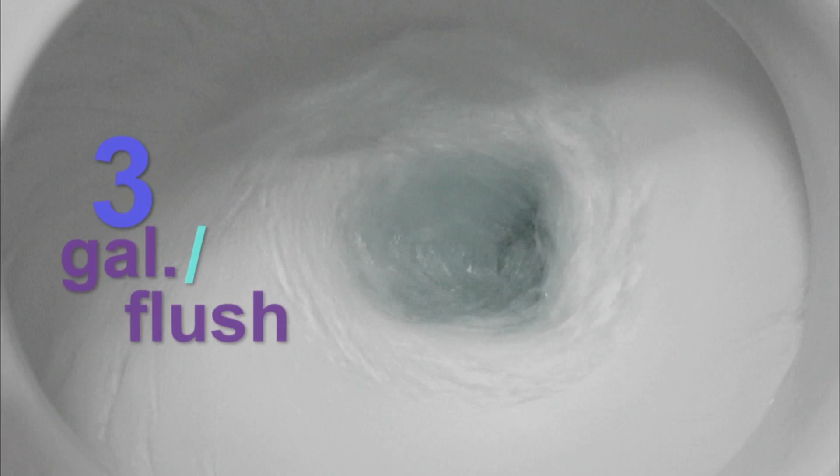Think about how much water we use every day. Our household chores, our daily hygiene, our lawns and gardens. The fact is, we each use more than 100 gallons of water a day, not to mention the huge amounts of water used by farms and businesses.

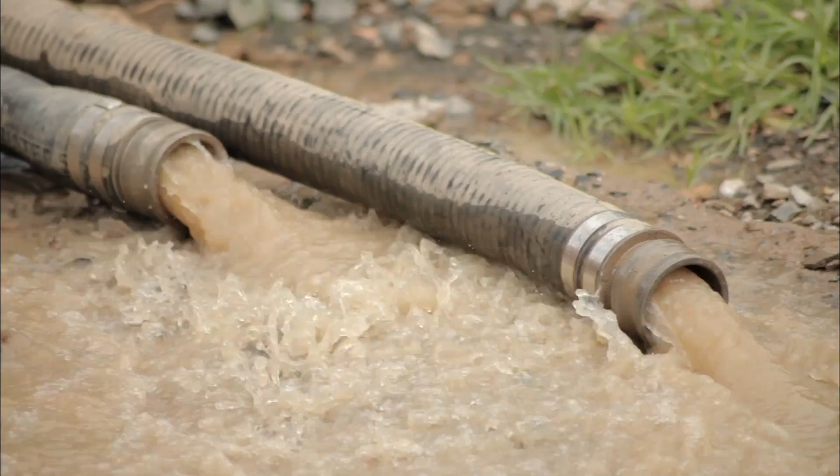Once we're done with it, the water seemingly just disappears. But here's the thing, it doesn't disappear. It becomes waste, and it needs to be treated. But our system for treating it in Connecticut isn't working. One region is even under state and federal mandates to correct the problem.

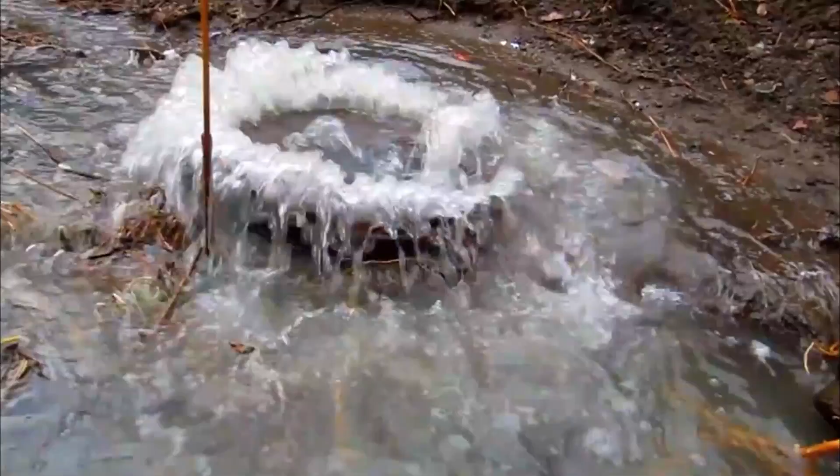Untreated human waste, untreated industrial chemicals and wastewater entering the water. Overflows of potentially raw sewage or partially treated sewage. Sanitary sewers can back up into the basements of people's houses. You have waterborne diseases that are created, and not a very happy population or a healthy population.

There's a problem and it needs to be fixed. But a solution is in the works, a massive initiative that will cost more than $2 billion called the Clean Water Project.

It's all being done by Hartford's MDC, the Metropolitan District. The MDC's Clean Water Project is really a dramatic and massive undertaking to really address a legacy that we have of older storm sewers and sewage sewers that are built in our older cities.

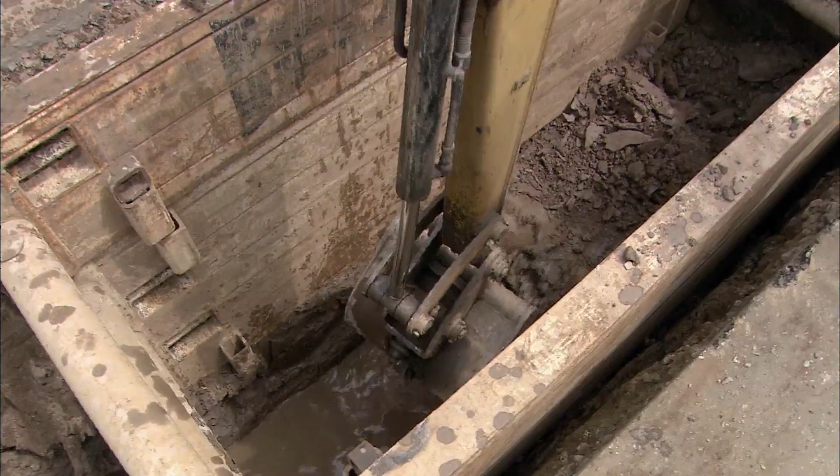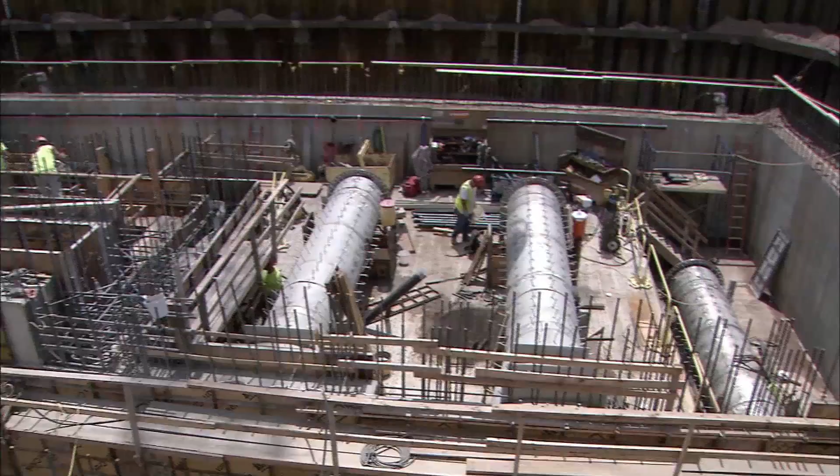We're doing the largest public works project any municipality's ever done in the state of Connecticut. It will take a lot of time, a lot of digging and building, negotiating and educating. Its efforts will have far-reaching effects for both our health and our environment.

Imagine life without sewers. Dumping dirty water outdoors in streets, dangerously close to drinking water supplies. That's how it was in the 1800s. Sewage and other raw contaminants were just literally running down the sides of the streets, causing public health implications.

Like many other cities, Hartford officials saw fit to build a system to carry that waste away. The city's first public sewer was begun in 1843 at a cost of $840. That's about $30,000 today.

The system grew in the 1850s, shortly before the Civil War, to serve about 30,000 people. It was considered state of the art. This was a massive step forward. Controlling sewage drastically reduced the incidence of waterborne diseases such as typhoid and cholera.

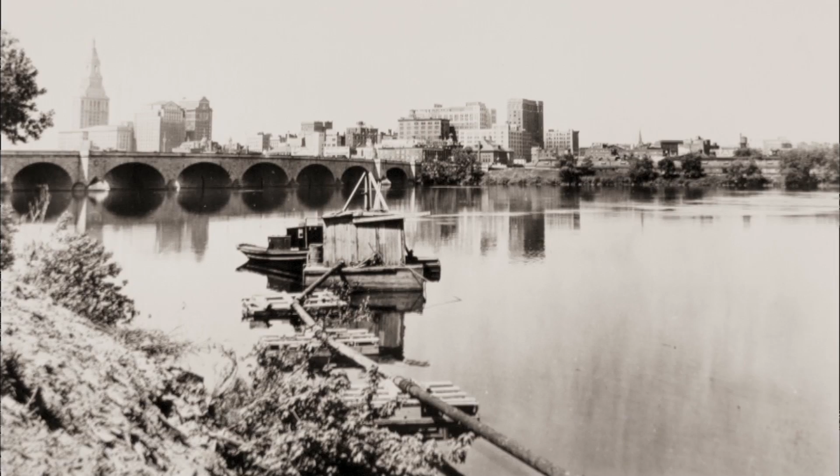But Hartford's, like most early sewage systems, discharged directly into area waterways without any treatment. Imagine yourself as an engineer at the time. What you're going to want to do is put all that water into a pipe and get rid of it. So the first poor solution, in hindsight, was just to have that pipe go into a river and a water body. Just send it downstream.

For almost a century, towns, cities, and factories in 4 states dumped their sewage into the Connecticut River, sending it downstream to become someone else's problem. The history of the Connecticut is a lot like the major rivers throughout the country.

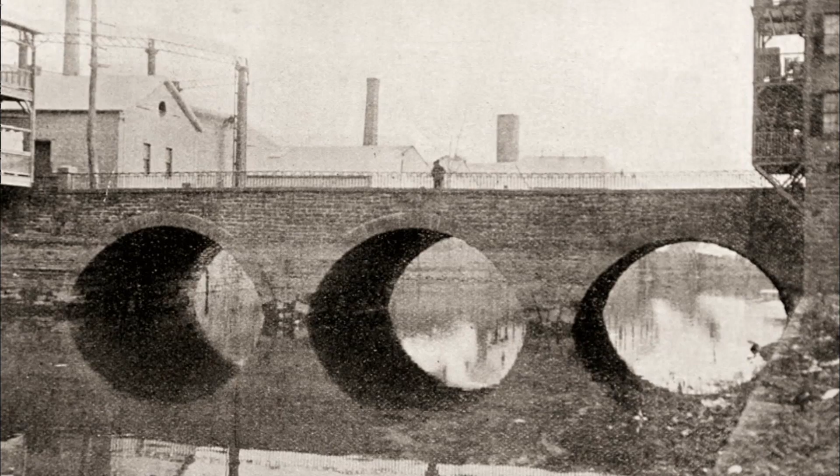We had raw sewage running into our rivers. We had industrial waste that was leaving factories completely untreated. It posed risks for both the people who lived and worked on the river and the animals that depended on its habitats.

When you've got a lot of untreated human waste, untreated industrial chemicals and wastewater entering the water, you're not only going to have an adverse impact on the small critters, the fish, but you also had impacts on the birds and other wildlife that foraged along the rivers or fed on fish.

In 1948, we lost our last bald eagle's nest in the state of Connecticut, and that was a huge problem in the 50s and 60s.

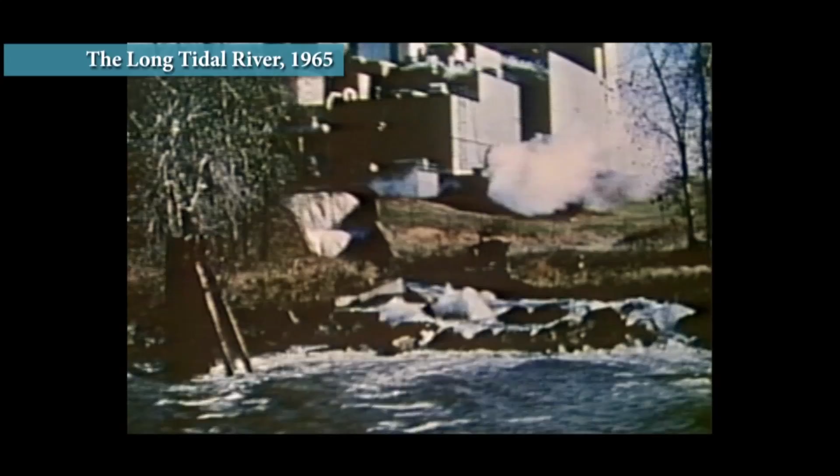Worse has been man's abuse of the river. By the middle of the 20th century, the Connecticut River was in such horrible condition that Katharine Hepburn, an Academy Award-winning movie star and Hartford native, was compelled to narrate this film: it has earned the soiled reputation of being dirty, smelly, and unfit for man, fish, or bird.

Being the downstream state, Connecticut inevitably receives the waste of its 3 neighboring states to the north. According to the State Health Commissioner, the river hasn't been fit for swimming for 50 years. Fair, noble, glorious river has now become labeled the world's most beautifully landscaped cesspool.

The river was in bad shape. Raw sewage was dumped into it from all the cities up north. People dumped their garbage into it. It was really a total mess.

We water skied here when we were little kids, and you really had to be careful where you fell in, because of swirling things that you don't want to talk about. And the impact swirls downstream. The Connecticut River supplies 70% of the fresh water going into Long Island Sound, so the water quality and ecosystems there are sullied as well.

We're not alone in this. By the early 70s, waterways around the country were overrun with sewage. In response, Congress passed the Federal Water Pollution Control Act, commonly known as the Clean Water Act. If you read the beginning of the Clean Water Act, it has these incredibly ambitious goals. It says the Clean Water Act's goal is to restore and maintain the chemical, physical, and biological integrity of our nation's waters.

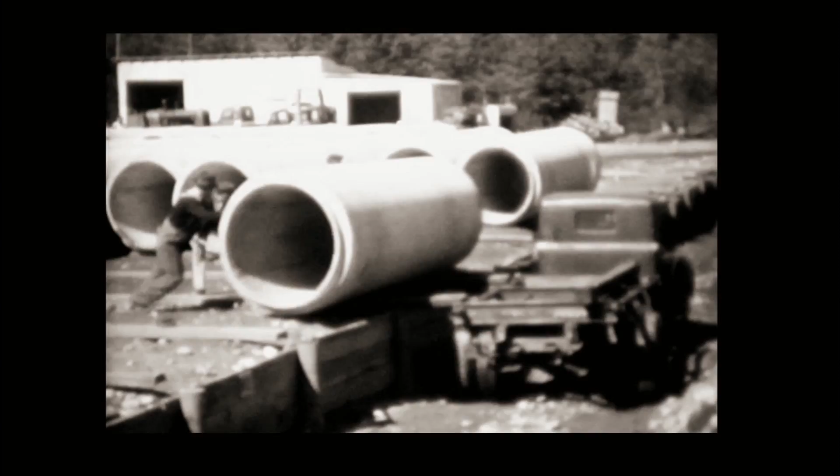In the first half of the 20th century, most people were concerned about making sure Hartford had enough water to supply homes and businesses, to keep people healthy, and industry thriving. But as the population and industrial activity grew, the volume of waste grew. And so the first water pollution control facility was built on the Connecticut River in 1938 by Hartford's MDC.

The facility served the region well for more than 30 years. But after the passage of the Clean Water Act in 1972, a facility like this could no longer do the job.

Today, we have the modern wastewater treatment plant, a facility so mechanically and technologically intricate, it brings students inside to learn about what goes on in there.

So we have 2 samples, I mentioned them—if they can stand a few unpleasant smells. Point to which one is plant water or which one is potable water, meaning it comes out of the sink. You can drink it.

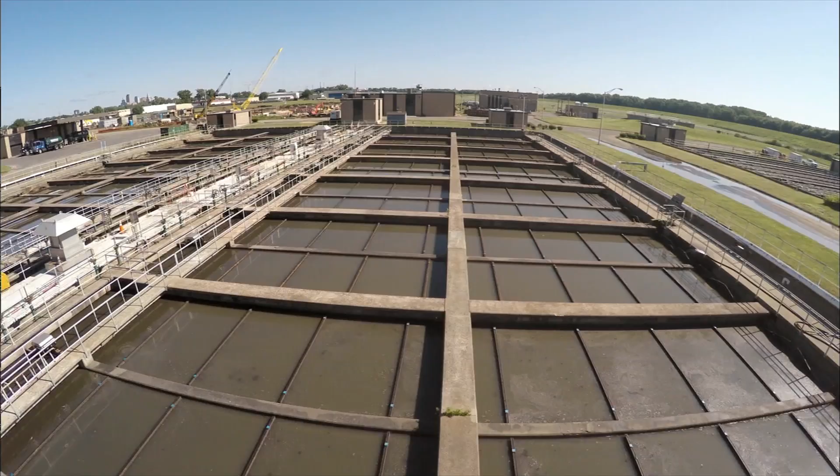Wastewater treatment plants are environmental marvels. They really are, and they help keep our cities working. The wastewater that we receive must be cleaned before it goes into the environment. It really is a manufacturing operation.

We have thousands of pieces of equipment and all the process controls, automation, and everything comes together to clean water.

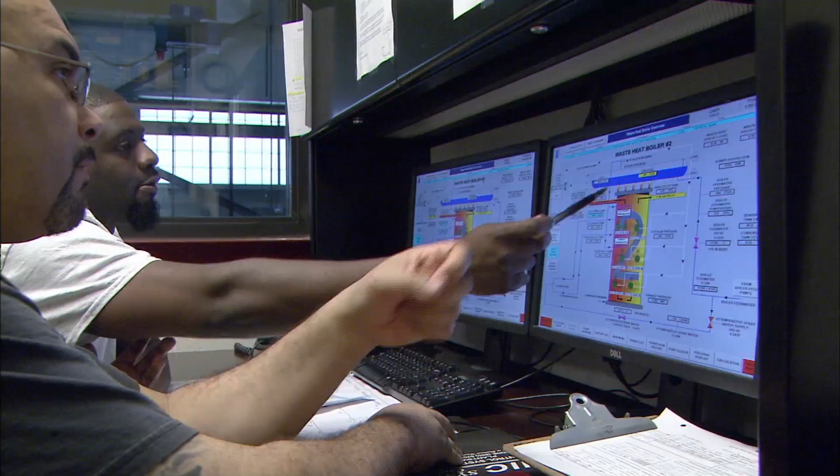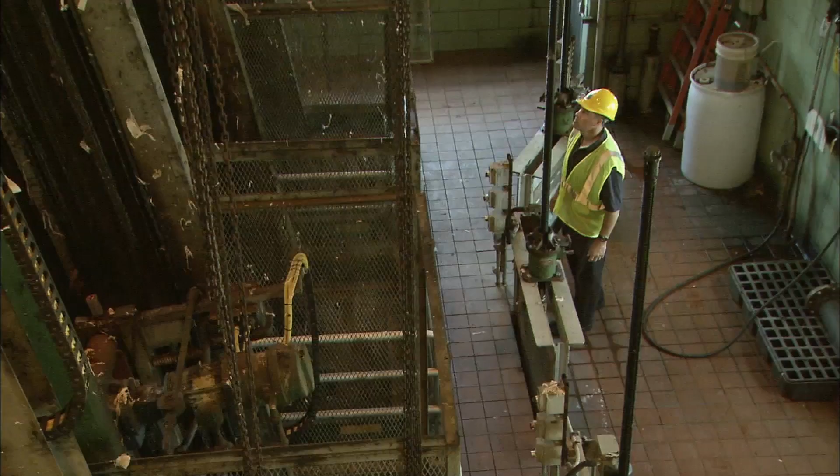Here's how: homes and businesses in the area connect to 4 wastewater treatment plants through a network of below-ground pipes. The raw material, the input, is the wastewater that we collect from all the residents, homes, businesses, industry, restaurants. This is what we call our headworks, or preliminary treatment—it's the first treatment step at the Hartford plant.

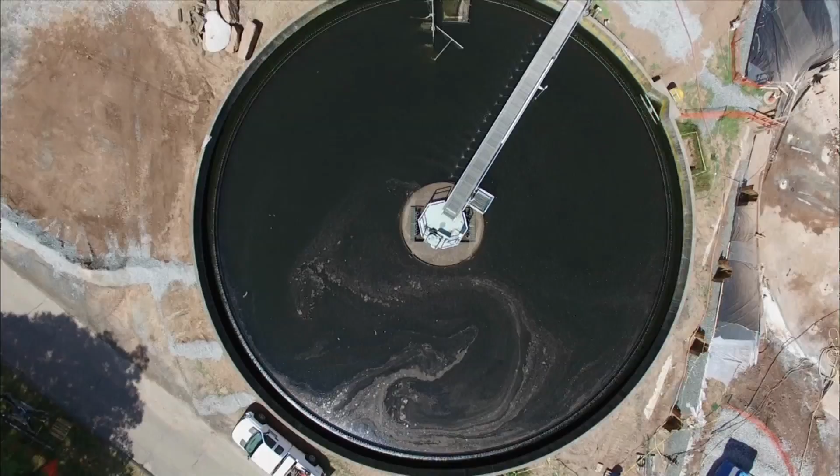A big part of treating the waste is removing nitrogen to prevent what's called nutrient pollution, one of America's most widespread environmental problems. The biggest challenge for us is not only to remove the bacteria that we're discharging to the Connecticut River, but also to remove the nitrogen. The nitrogen in the water comes from the users of the water themselves—it's largely in the solids and liquids from human waste that comes to the wastewater treatment plant. So it's not like someone is putting nitrogen into the water; it's a byproduct of human waste.

Nitrogen is a natural part of our ecosystem, but too much of it in the water can overstimulate the growth of aquatic plants and algae, decreasing the oxygen that fish and other marine life need to survive. Some of these algae blooms can produce toxins harmful to people who come in contact with them, or eat fish from polluted water.

Nutrients can also pollute groundwater and endanger drinking water sources. That nutrient load can cause challenges to the entire ecosystem.

In this process, we treat that sewage through a completely natural treatment process. We don't use any added chemicals. The microorganisms in here, in an activated sludge—the activated means it's biologically active.

What happens in a wastewater treatment plant is essentially the same as what occurs naturally in a lake or stream. The microorganisms in the activated sludge settle to the bottom of the tank, they rest, they get hungry again, and we take a percentage of them back into the treatment process in the aeration tanks. The wastewater treatment plant revolves around biology and the microbes that are there to help digest the waste and get rid of the nutrients.

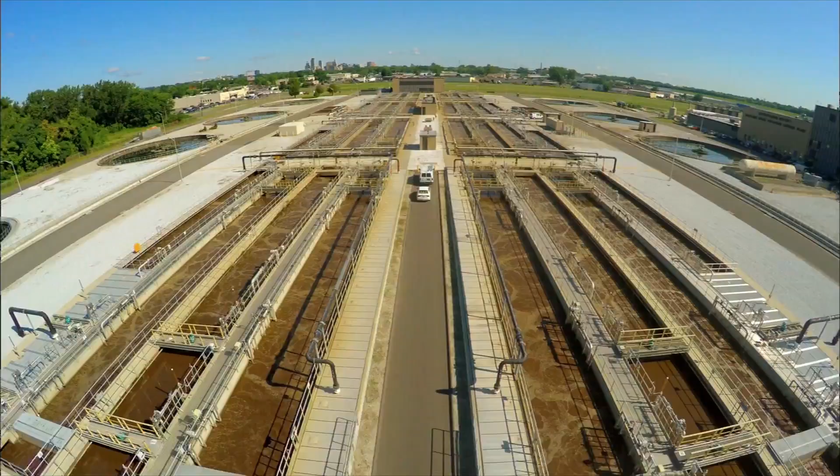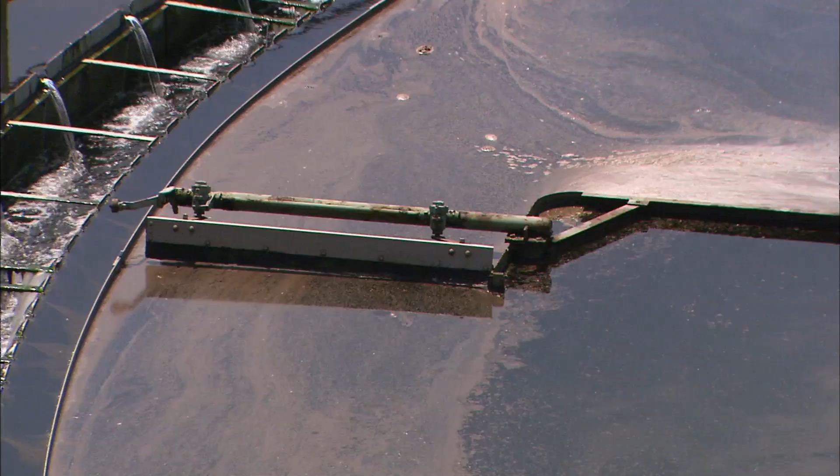It's an interesting intersection of both steel and concrete and engineering all around a somewhat fragile and occasionally temperamental biological process that needs careful care and feeding to work at peak efficiency. It really, in many ways, is a natural process that we just try to speed up.

How many think this one's water comes out of the tap? All right, good guess. That's the water that comes out of the tap. But visually there's not a big difference, right? Would everybody agree that this looks pretty clean?

This single plant treats about 60 million gallons of water a day. If we took all the water that the Hartford plant treats in a day and put it in gallon milk jugs, we'd line them up side by side, and it would make a line from Hartford to California and back, with a little side trip up to New England.

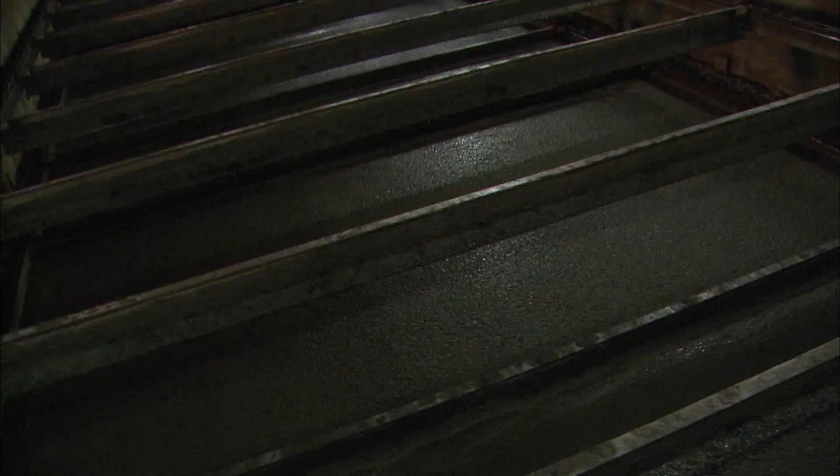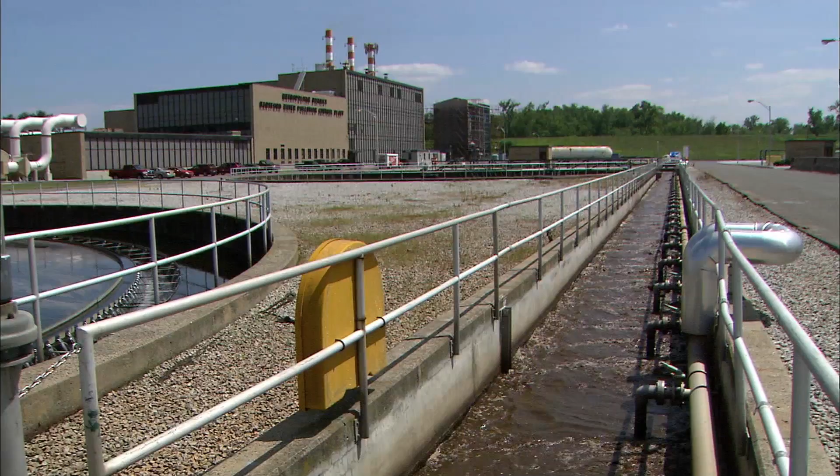These are facilities that have to operate 24/7, 365 days a year, and we have to keep them operating. We always have to treat that water. We can't stop and ask everyone not to flush for a day or two while we take care of a problem. The water always comes in, so it's a constant process.

But those round-the-clock efforts have paid off. The Connecticut River is cleaner because of the advances in wastewater treatment. Long Island Sound is healthier because of the advances in wastewater treatment.

The Connecticut River is a much improved body of water than it was 30 years ago. The Connecticut River doesn't smell anymore. The Connecticut River and its tributaries don't run different colors anymore, and they are much healthier than they were 10, 20, 30, 40, 50 years ago.

Marker 48 actually has an osprey nest on it. Ospreys have made a tremendous comeback along the Connecticut River. As the waters become healthier, wildlife begins to thrive again, and the benefits multiply.

When this river system is carrying less nutrients down, Long Island Sound gets healthier, and Long Island Sound gets to be a more important economic engine and can continue to grow and produce ecological abundance, which produces recreational abundance, which produces economic abundance, which produces a higher quality of life, and people make decisions about where they want to live and work based on amenities.

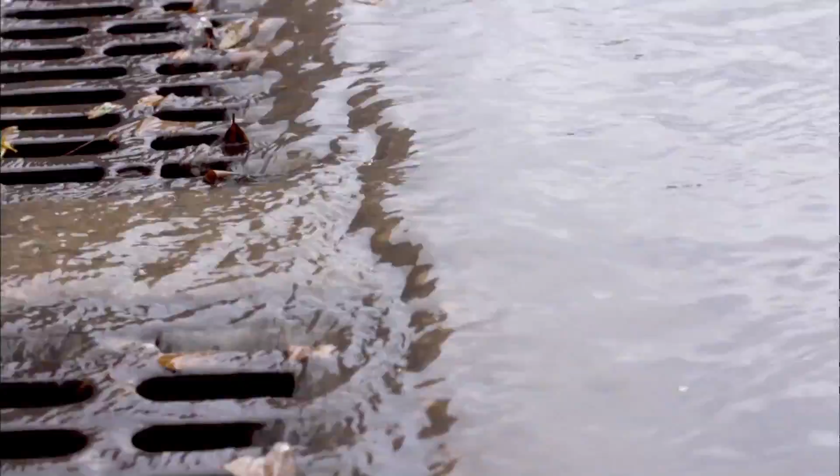During rain events, customers may experience slow draining. They may have water coming in through a wall that is out of the norm. The water doesn't get absorbed by the ground anymore and it has to go somewhere.

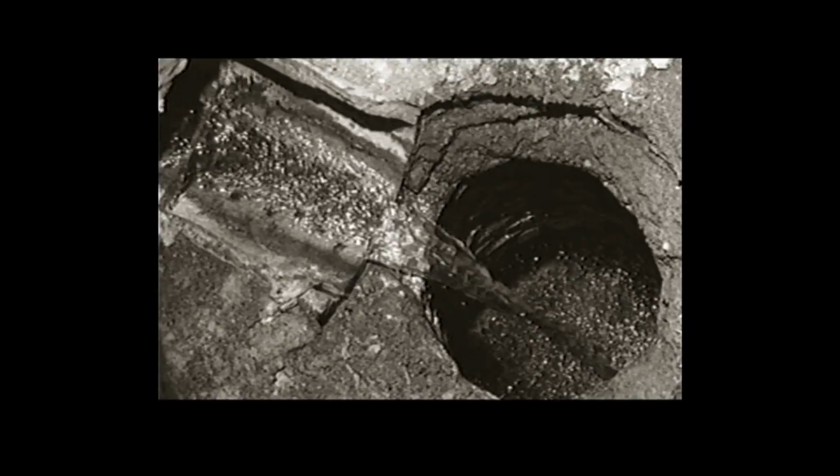In Hartford, the threat of rain to our system exists in large part because of a decision made more than 160 years ago. The sewer system built in Hartford in the 1850s uses a single pipe buried beneath the streets. Both sewer water and the runoff from rainwater are collected in this one pipe.

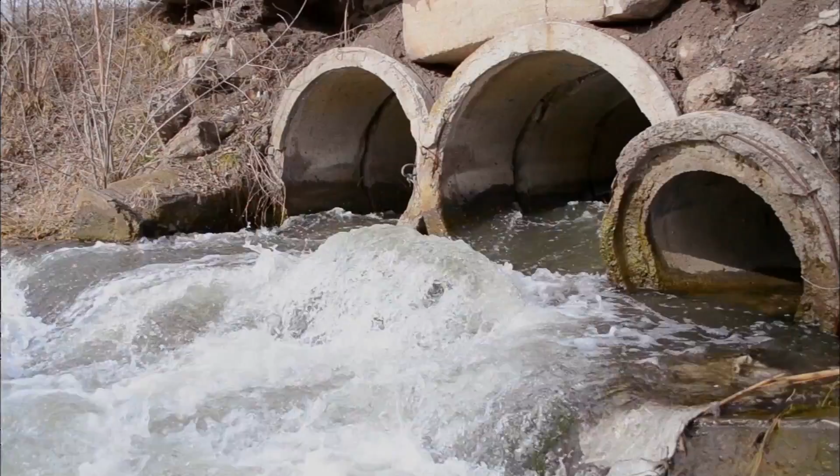One of the things that was done in Hartford, as was common in many urban areas at the time, was to link together the sanitary sewers collecting wastewater from people's houses with the storm sewers from the streets. So when it's dry outside, the flow in that system is just the sanitary sewage. But we've heard what happens when it rains.

The towns around Hartford have newer systems, so they have two separate pipes, one for sewer water and one for rainwater. But many people send rainwater into the sewer pipes connected to their homes.

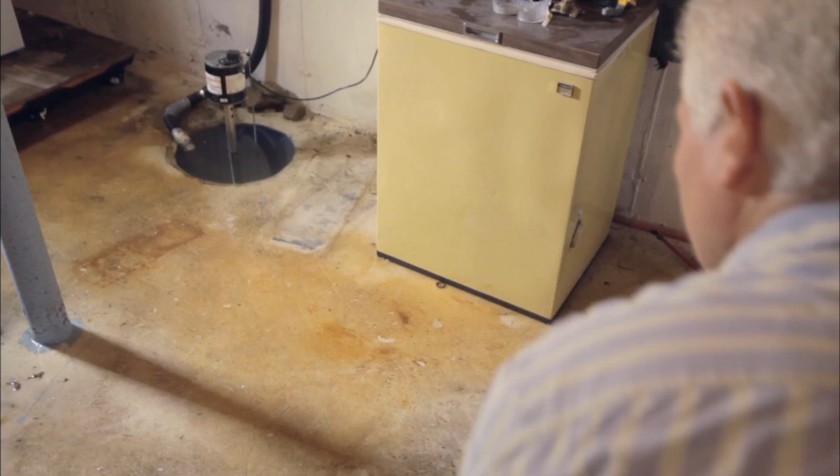It's very expensive to build storm systems. Storm systems in the communities were built to deal with stormwater from the streets, but not from the homes. Residents have no place to put that stormwater. It comes into their basement, they have high groundwater tables, and the only solution is to put a sump pump in their basement and pump it into our system.

You've got the foundation drains, you've got the sump pumps going into people's homes. That's all exacerbating basically the problem in those communities and then in Hartford.

As the population grows, the problem gets worse for treatment facilities that were built to serve about 30,000 people. Now they're serving a population of about 400,000 people. So this infrastructure is very old. There's leaks in the pipes, so rainwater can come in and cause more flow in the system.

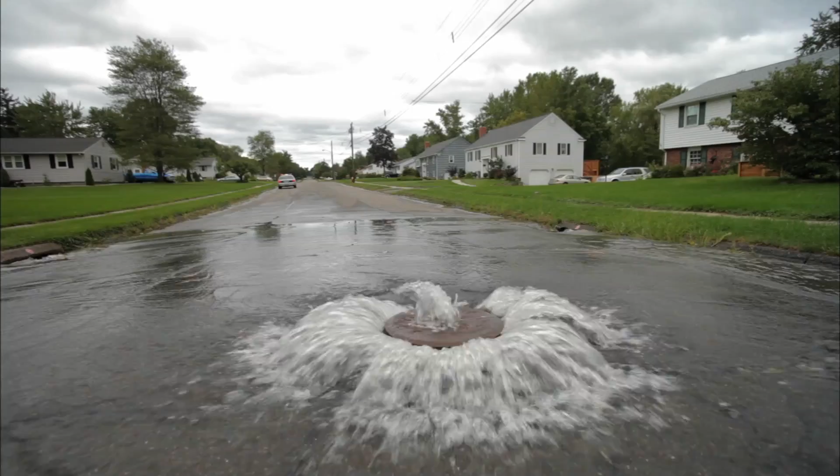It's really not just a Hartford problem, it is a regional problem. When it rains, there's a whole huge flush of water entering all these pipes. You've got stormwater and domestic wastewater all coming into that treatment plant when it rains.

If there's a good downburst in the Hartford region, we'll see the flows to the plant increase very quickly. Our average daily flow might be 60 million gallons a day, but during a wet weather period, we could treat in this facility upwards to 130 or 140 million gallons a day of wastewater.

When it rains, it pours, and it pours untreated sewage and untreated rainwater still into our rivers. What do you do? Do you let that treatment plant get flooded out? No. What you do is you put a release valve in that system.

When it rains enough and the capacity of all those pipes and all the basins and everything in that treatment plant are reaching capacity, you pull a lever and you have an overflow. That's called combined sewer overflow. What you would have is actually raw waste going directly out into the river.

On average, about 1 billion gallons overflows into eventually the Connecticut River. Those are big deals because when you treat sewage, you're taking out the bacteria. When that goes directly into the stream, that is a massive load into the stream, and that can create huge ecological problems.

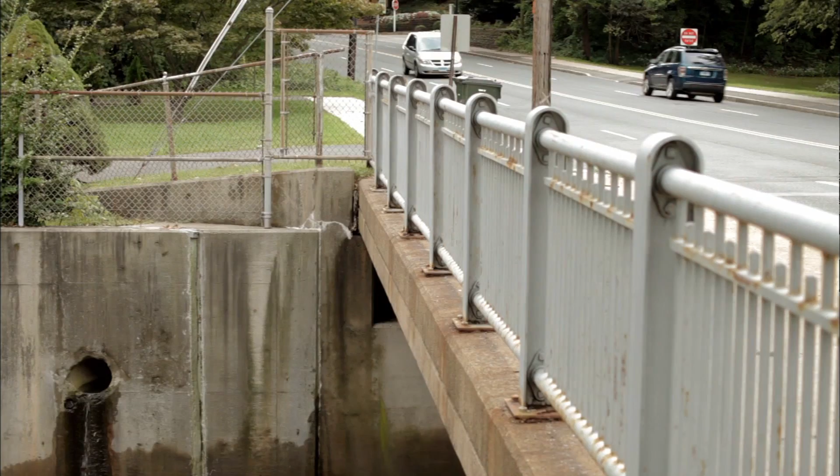The court order forces some tough questions. How do we best get the stormwater out and comply with these regulations and mandates from the state and federal government? What we do here in Hartford is going to be what is demanded of New Haven, Bridgeport, and all the other cities in the same basic condition.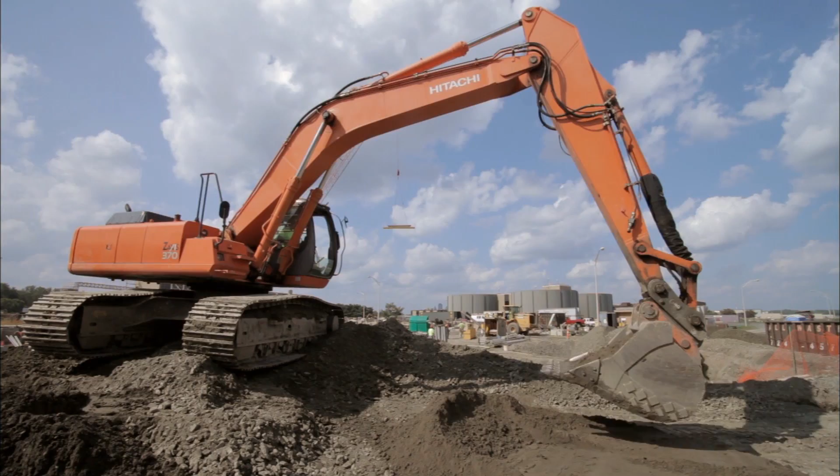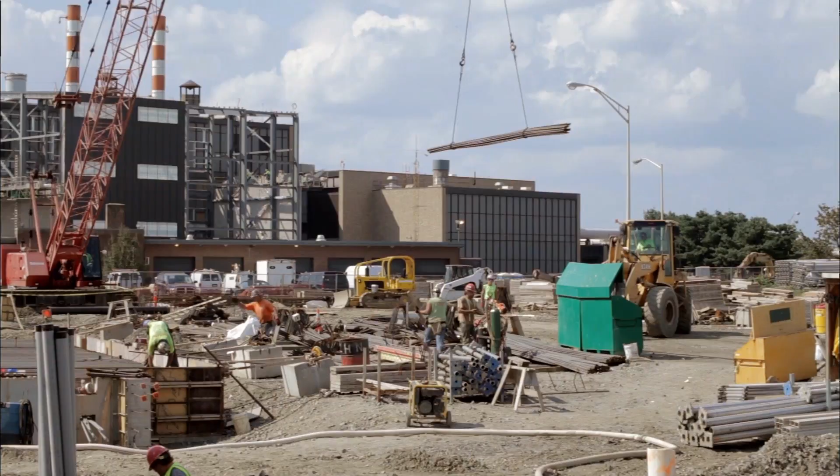Complying with the order would take time, money, and ingenuity, and it would be huge. The Clean Water Project is designed to slow, hold, and retain those flows so they can be treated before they're ultimately discharged.

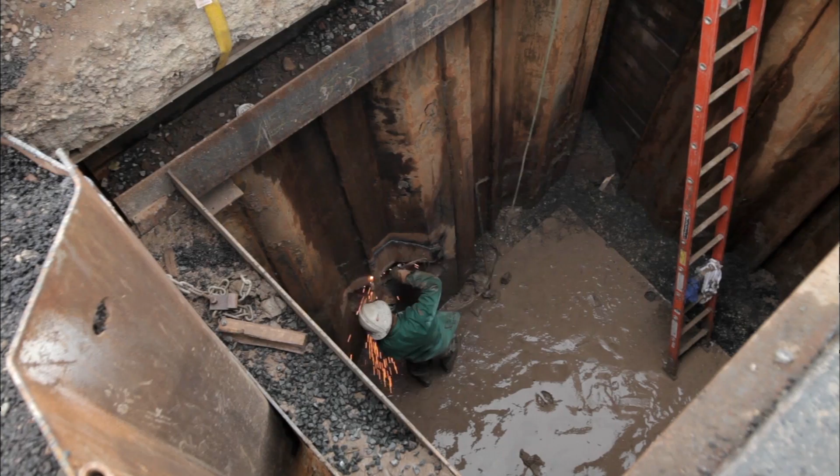There's a lot of utilities underneath the streets—electrical, cable, our own water pipes—so we've got to find a path through all those pipes. The MDC's initial plan in 2004 was to fully separate the sewer pipe from the storm pipe, to ease the burden on the combined system.

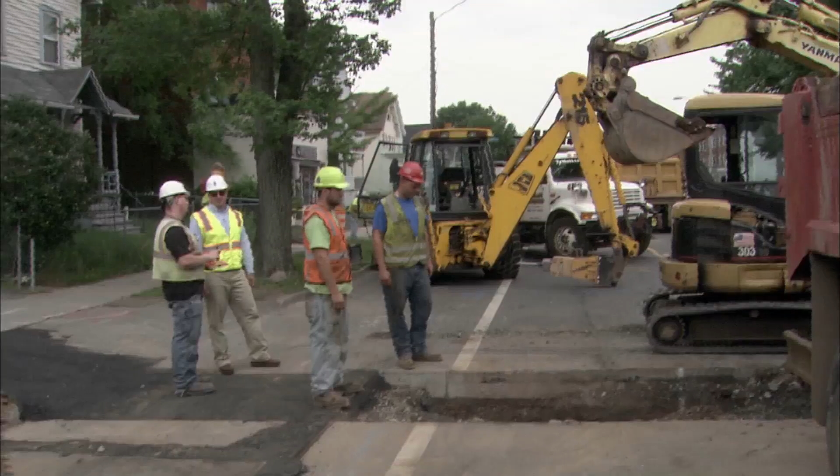What we've realized since is that separation is very expensive. We had to separate the sewer, put in a new street, then new curbs, then new sidewalks, then lateral connections into the houses, and when we got into the houses they were talking about plumbing. What we realized was it would be more cost-effective to actually collect all of the storm and treat it.

So in 2012, we began to work with the state of Connecticut, DEEP, to change the concept from full separation to utilizing more storage tunnel capacity to collect those CSOs. A huge storage tunnel—it's the centerpiece of the Clean Water Project.

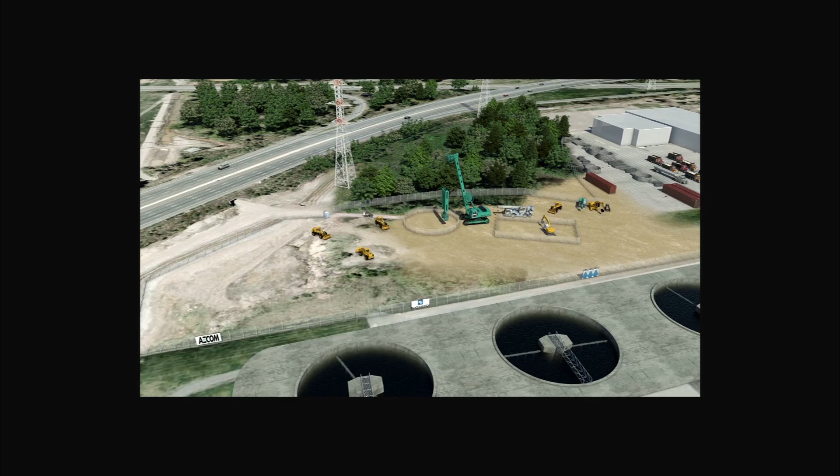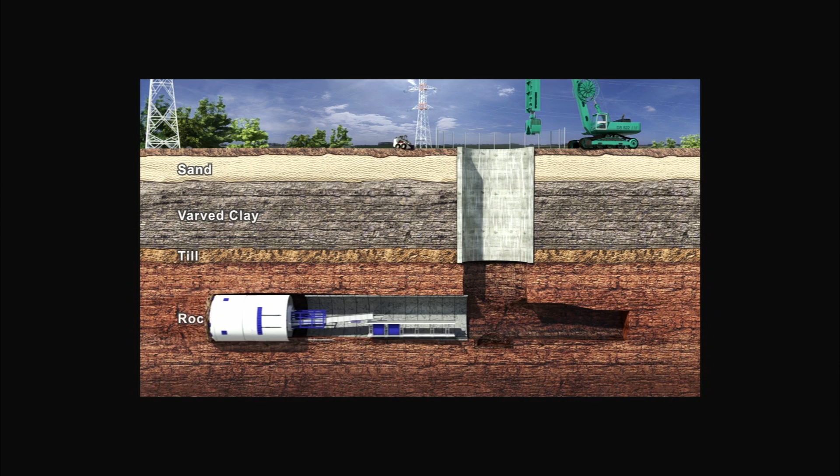We're actually constructing an 18-foot diameter tunnel. We will start it across the street from our Hartford Water Pollution Control Facility, drill a shaft about 200 feet deep, install a tunnel boring machine, and it will drill and bore out this 18-foot diameter tunnel all the way out, more than 4 miles, to West Hartford.

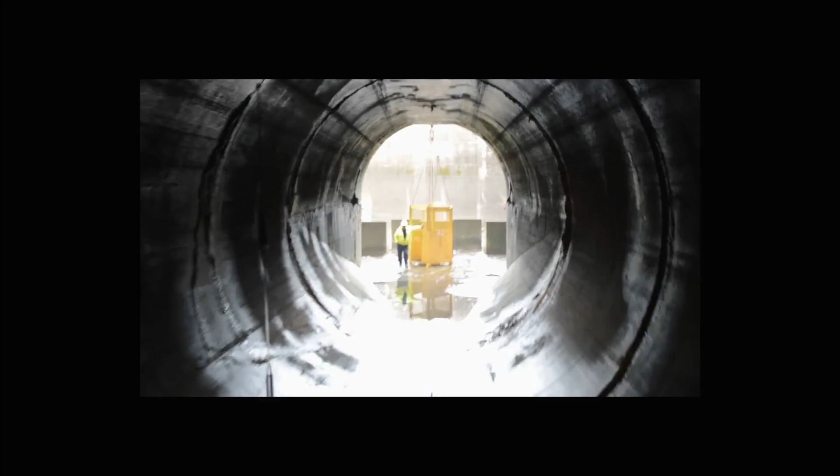During these rain events that would normally overflow our combined sewer system, this tunnel will store more than 40 million gallons of wastewater that will eventually get treated at the Hartford Water Pollution Control Facility—an enormous underground tunnel that can act as a buffer or delay mechanism, allowing the water to be held, retained, and then slowly metered out to the sewage treatment plant to be treated in its normal fashion.

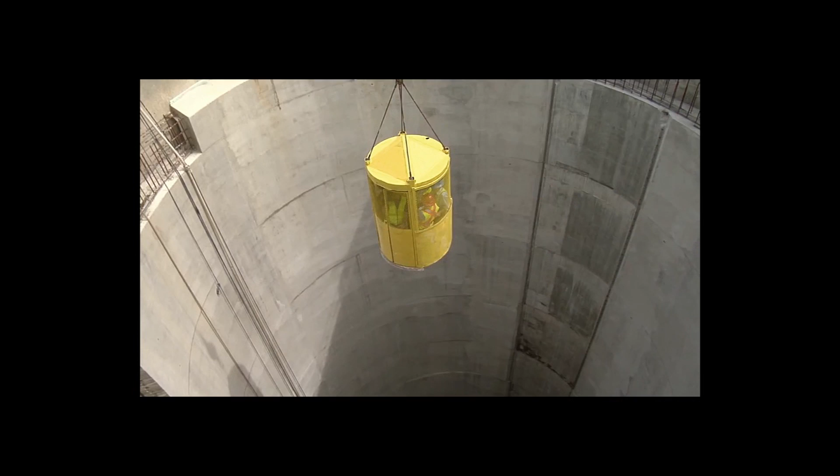That means the billion gallons that would normally be discharged to the Connecticut River each year will now be significantly reduced. Some 15 years from now, during a typical year, we will not see any discharges to our streams. That is a significant accomplishment. Other cities have already had success with these tunnels, such as Columbus, Providence, and Chicago.

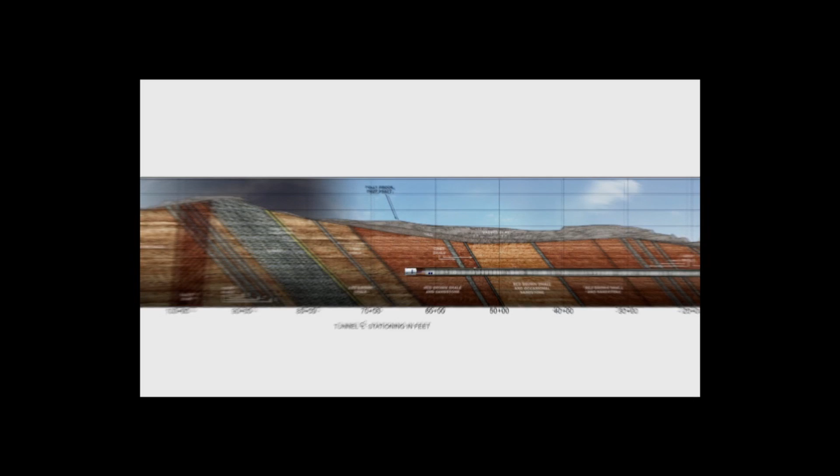They've all gone to deep rock tunnels to convey water to the wastewater plant and eventually pump it up for treatment. One of the things I like is the lack of disruption. The deep rock tunnel can be drilled underneath, nobody knows what's going on, and it collects the wastewater, gets conveyed to the plant, so there's much less impact to the public.

It doesn't preclude options in the future as other changes may need to be made. When you look out 30, 40 years from now, we don't know what technology may be, we don't know what water quality standards and limitations may be, and you want to build a system that's flexible and can adapt to what may happen in the future.

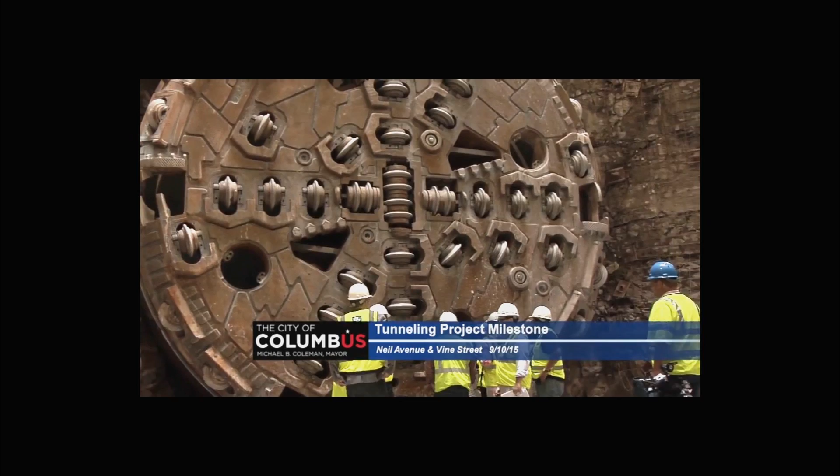A project this ambitious not only takes money, it takes time. It would take approximately a year to build the tunnel boring machine. It's a very specialized piece of equipment that has to be constructed new for each tunnel that's built. Once we start boring the tunnel, it's probably a 3-year process until that project is complete.

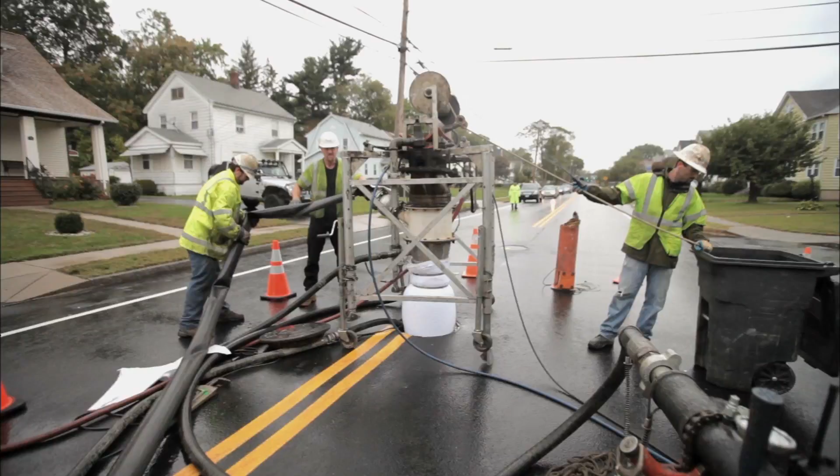Maintaining the sewer system is a large task. We now have 1,500 miles of water pipe and 1,300 miles of sewer pipe. We have 4 sewage treatment plants, and all of that has to be maintained. It's a lot of grit, a lot of wear. It also creates failures within the system, and that's our challenge, is continuous maintenance.

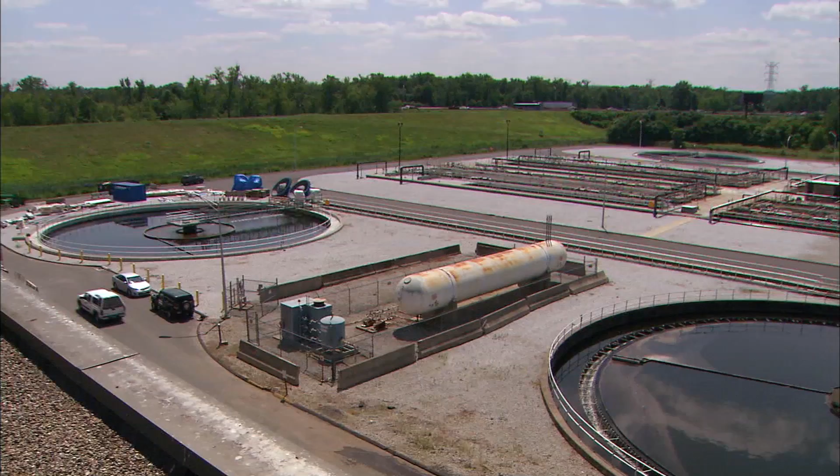Anytime you're dealing with wastewater, you're concerned with how am I going to keep the wastewater flowing?

MDC Command Center, how can I help you? Command Center is a 24/7 operation. We receive all the calls from public agencies, residents, customers, water and sewer related issues. We get calls about water leaks, meter leaks, flooding in basements, sewer backups, and the police, because there's cavities or depressions in the road. We have approximately 500 water and sewer collapses per year.

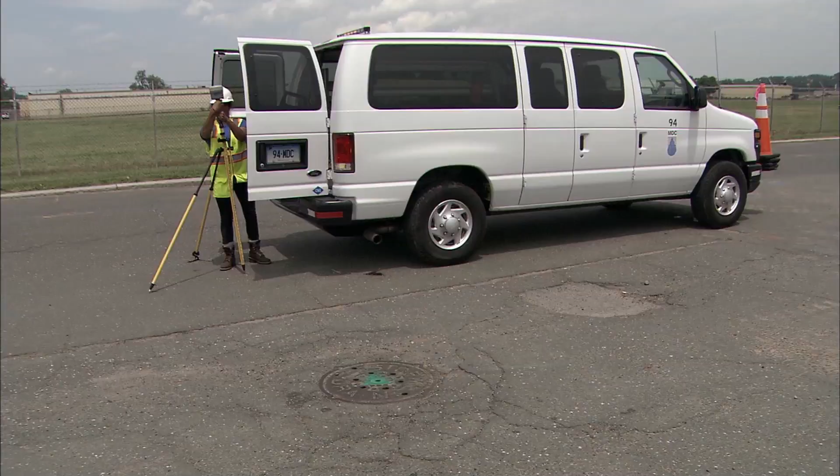To an outside observer, the MDC's repair and operations crews can look like an army of specialists. There's skilled mechanics, licensed electricians, plumbers, carpenters, every part of the craft that you can imagine in order to maintain a facility. This already complex system has only grown under the Clean Water Project.

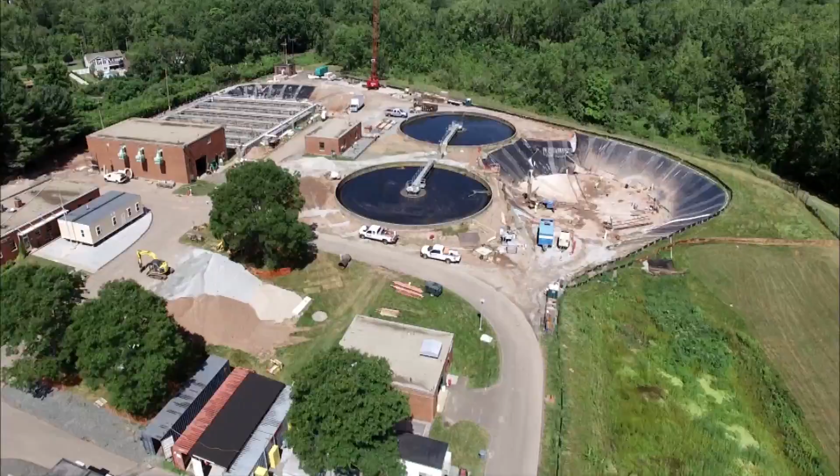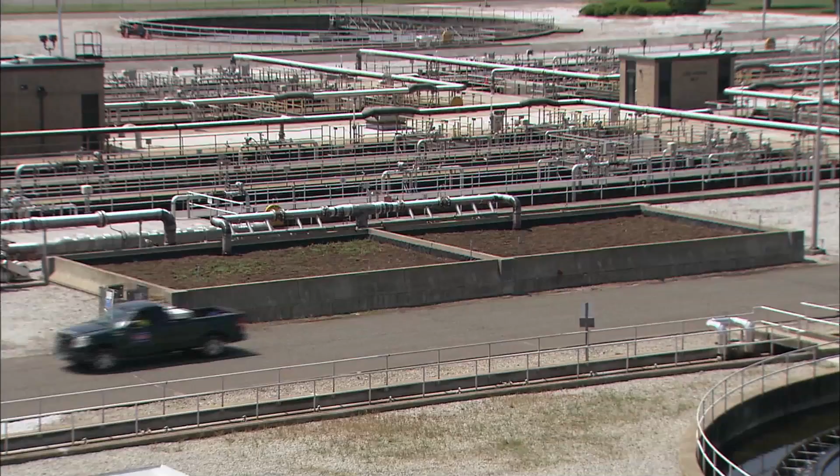The project's largest environmental benefit comes from increasing capacity at 2 of the treatment plants. We've had dramatic expansion in the South Meadows plant. We've spent probably in excess of $400 million just on that plant to upgrade it. That plant can now treat more flow coming from the sewer systems and also reduce the amount of nitrogen discharged into the Connecticut River, and ultimately Long Island Sound. We have increased our secondary treatment capacity, adding more aeration tanks and clarifiers so that we can remove even more nitrogen from the water.

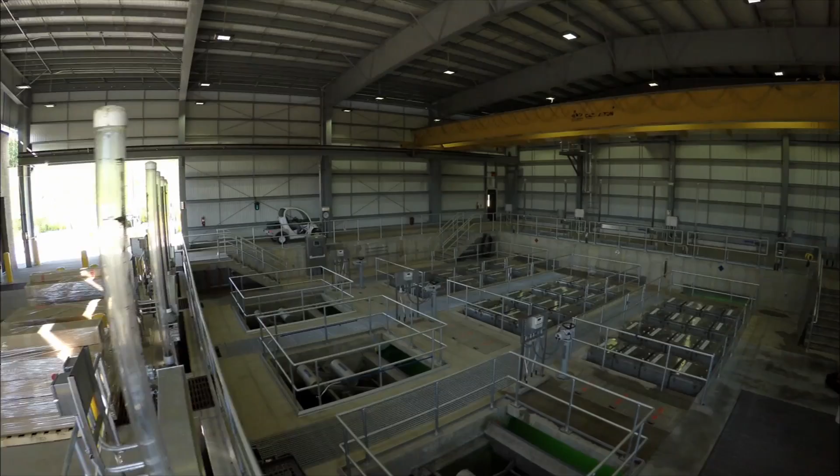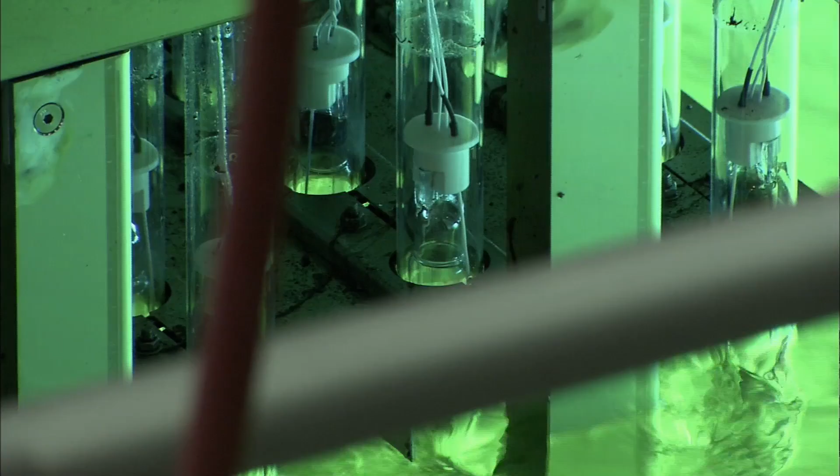The plant also improved the wastewater disinfection process with a new ultraviolet disinfection facility. In years past, we used chemicals that could be dangerous. So to be safer for our environment as well as our employees, we've gone to ultraviolet disinfection. It's light through a series of about 1,700 light bulbs that vary depending on the amount of water and how clean the water is. So we essentially disinfect water with light.

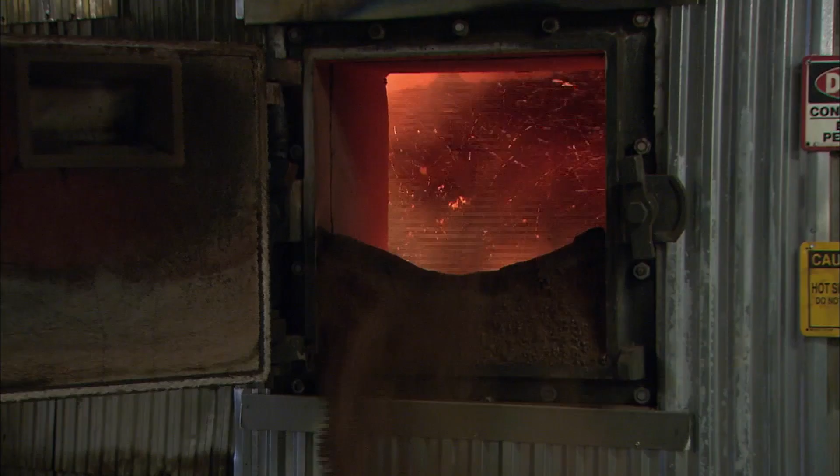Behind us is the waste heat recovery facility. It's not a wastewater treatment process, but an actual power plant. Another improvement uses excess heat from the process that incinerates solid waste to generate nearly 40% of the Hartford treatment plant's total electricity needs, reducing the carbon footprint and costs. That heat recovery plant produced over $1 million a year in revenue, which helps mitigate the costs to our customers. Those kinds of efforts also help keep the MDC's rates among the lowest in Connecticut.

We have a number of towns across the state and across New England that utilize our incineration as a way to get rid of their sludge. So we make approximately $4 million a year in revenue, and that helps mitigate the impacts to this program.

How many more of these today? We're going to move down the road, so we're going to do one more today.

Crews are also inspecting and repairing the aging network of pipes and manholes. We have cleaning and lining projects, which actually clean out an existing sewer.

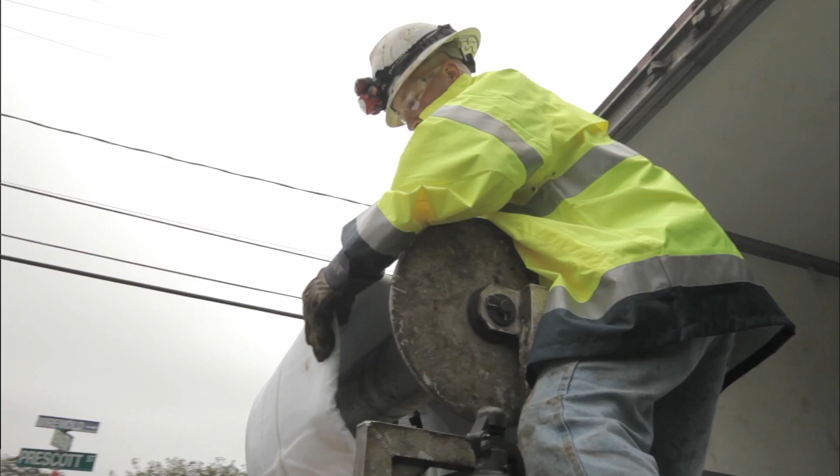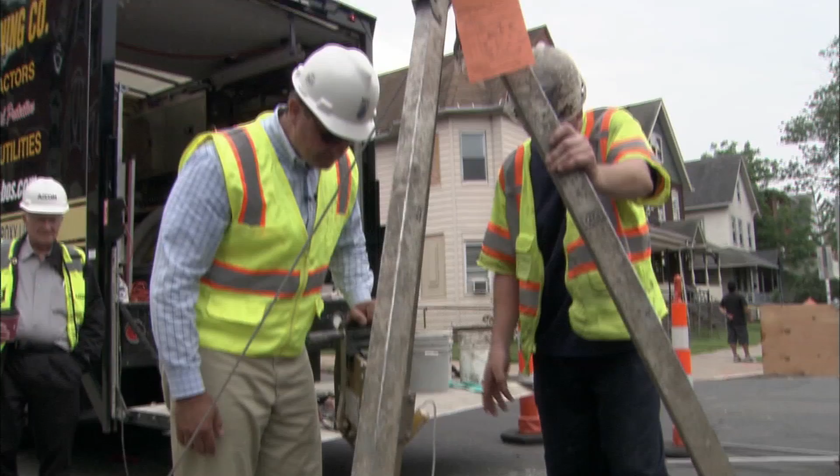Rather than replacing it with a new sewer, they'll insert a liner into the sewer, designed to prevent groundwater from coming in from the outside. We also have projects that replace manhole frames and covers, another source of infiltration. They've applied a 2-part epoxy spray-on liner to this manhole to help seal it up. Manholes can develop leaks, and you could have thousands of gallons of water running down to our treatment plant, which then has to be treated even though it's groundwater. So lining this manhole prevents all that inflow from going to our plant.

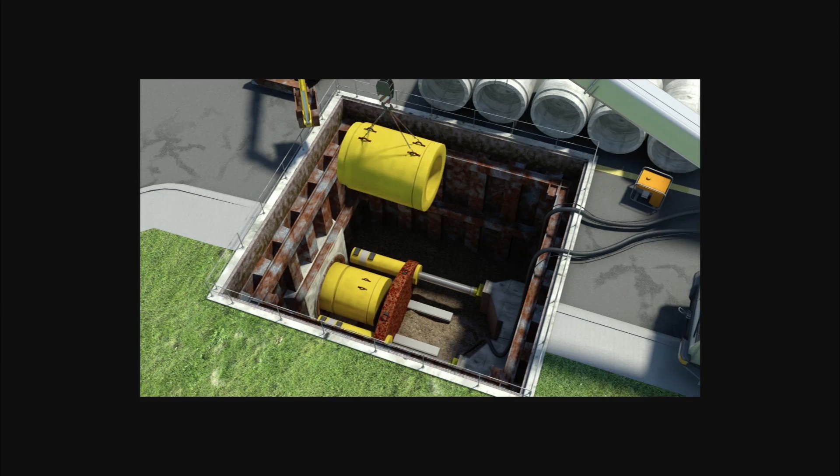To handle the combined sewage and stormwater flowing from area towns to the treatment plants, large interceptor pipes are also being installed. Think of them as highways, getting from one location directly to the treatment plant. And even though full separation of the entire system proved too costly in the early stages of the project, there are still strategic areas that require separating the stormwater from the sewage.

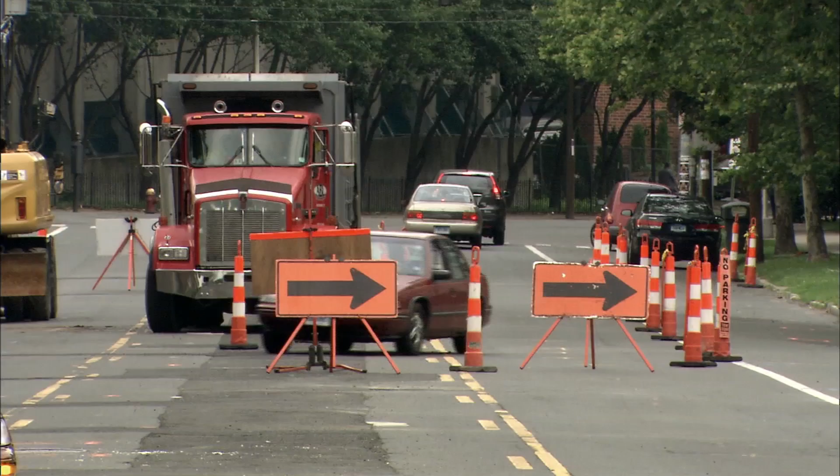It's very easy to build a sewer pipe in the middle of the street. It's very easy to build a water pipe in the middle of the street. But it's very difficult to build that same pipe and try to mitigate the impacts to the community. We try to construct our projects with minimal impact to the residents, preferably no impact. The challenge, as you can see, is traffic. We've got to keep people moving around. We've got to keep the residents safe on the sidewalks. People have to get into their homes.

Starting Fairfield on July 7th, the paving.

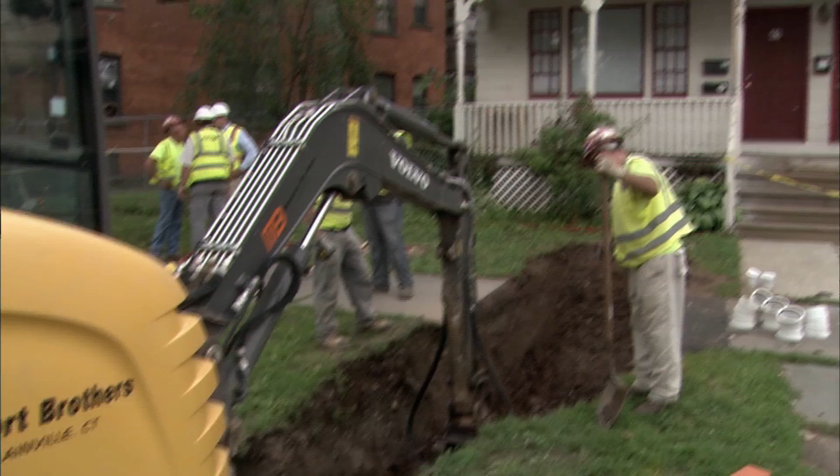Community outreach is a huge part of any project that can disrupt local communities. We had weekly and monthly meetings with the community itself to make sure that we were accommodating and mitigating the impacts to construction. We're impacting entire neighborhoods, 10 to 15 streets on some of these projects. You can't just go out there and show up on site and start digging. There's a lot of coordination that needs to take place. It requires a lot of front-end work, meeting with key stakeholders, and devising traffic patterns that are going to work for everyone, allowing access to their businesses, their properties, etc.

There's one lateral in the roadway that needs to be connected.

It also involved opening local offices in each of the affected communities to keep residents informed. Each year, these offices interact with thousands of residents.

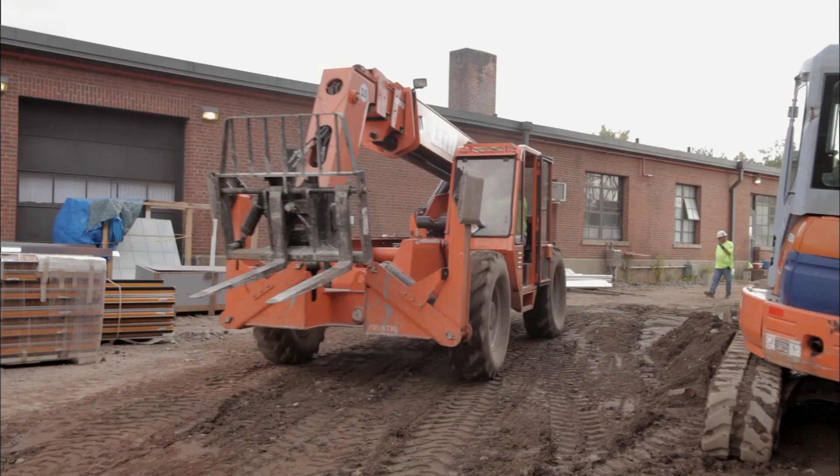Huge infrastructure projects like this don't come cheap. MDC officials needed to raise over $2 billion to fund the project, and they're faced with the daunting prospect of asking voters to pay higher rates. The big issue is, how do you pay for this? This is an enormous project.

A major source of funding comes from the Connecticut Clean Water Fund. The MDC's Clean Water Project is a major borrower, in fact the largest borrower from the Connecticut Clean Water Fund. Since inception, the state has approved loan and grant commitments to MDC totaling $785 million, and most of that, or a large portion, is for the actual Clean Water Project.

The state raised money by issuing special green bonds that attracted investors and kept borrowing costs low. Our success is really measured by getting the cost of funds down as low as possible, and on the clean water revenue bonds, having the AAA credit ratings is a big help. One of the things that makes these bonds attractive to investors is that they are for environmentally friendly purposes - they are green. Even before we started calling them green bonds, they were always for environmentally friendly and responsible projects, and I think that is something people like.

But most of the money would have to come from the ratepayers through an increase in their water rates. Our water has traditionally been the cheapest water in the state of Connecticut from a cost standpoint, but it's also the best quality water, probably in the United States. A special referendum was scheduled for water customers to vote on the rate increase.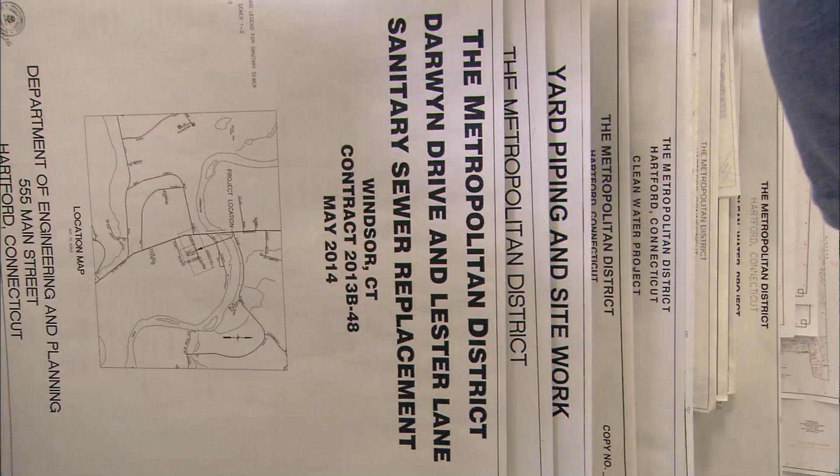I'm impressed at the size and scale of it. The other part is it's a creative approach to a real, challenging problem that we have in cities throughout Connecticut.

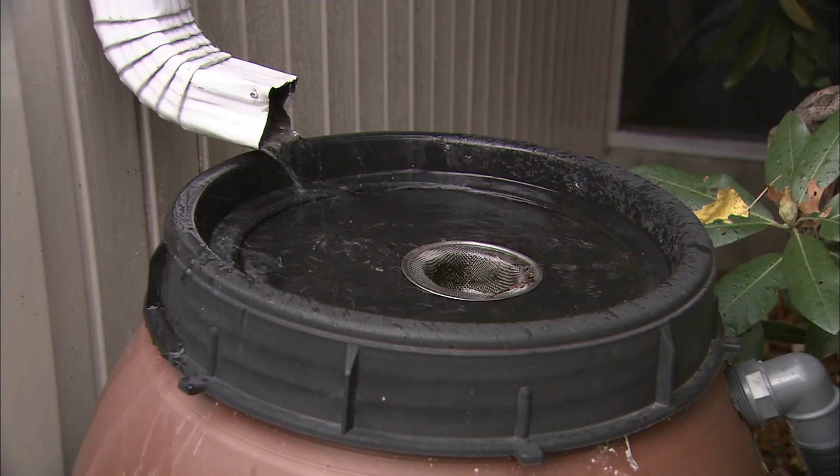Even though construction projects and environmental change can come slowly, there are ways all of us can help keep our waterways clean now. You can install a rain barrel. Rain barrels collect water from rooftops, reducing the amount of water going into storm drains. You can then store that water and use it later. It even has financial benefits, reducing your water bill and the electricity to pump that water.

Help prevent stormwater from getting into the sanitary system by disconnecting sump pumps and downspouts from the system and redirecting them to your yard or rain barrel.

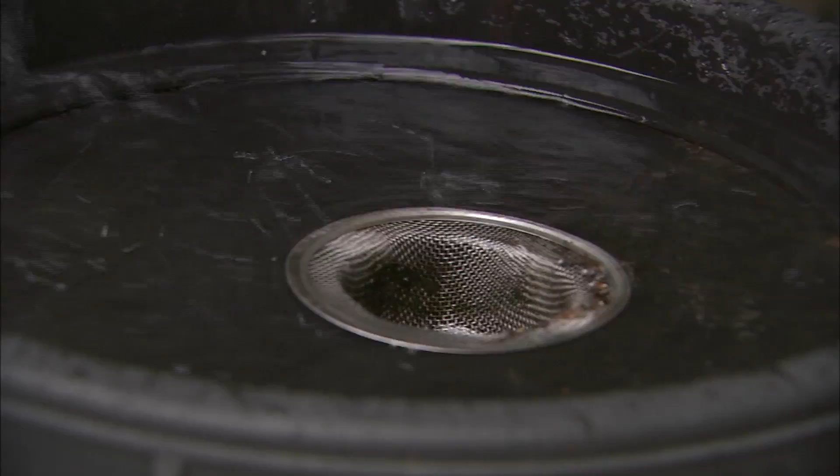It's the management and planning of it that's been impressive for me because there are a lot of moving parts - there's treatment, storage, collection systems, pumping systems, backup power. All these elements have to be put together, and then you have to figure out what is the critical path, what has to be built first, so that it's ready to accept the things that are going to come later.

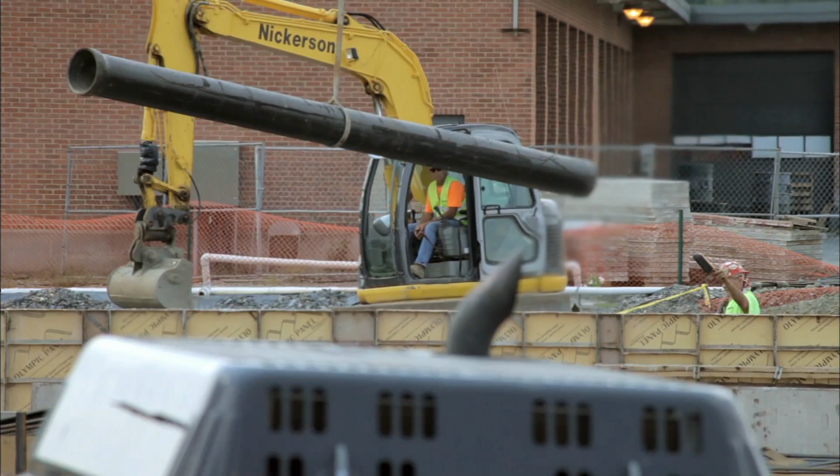There's an economic impact to what we're doing here, and we have to make sure we're doing it right and as swiftly as possible, but also the additional minority businesses that the MDC requires.

The challenge is understanding the many different requirements that we have to comply with from the state and federal level, but also just putting our project specifications together. There are requirements such as iron and steel requirements, made in America requirements that we have to pass on in our bid packages to make sure that they are followed.

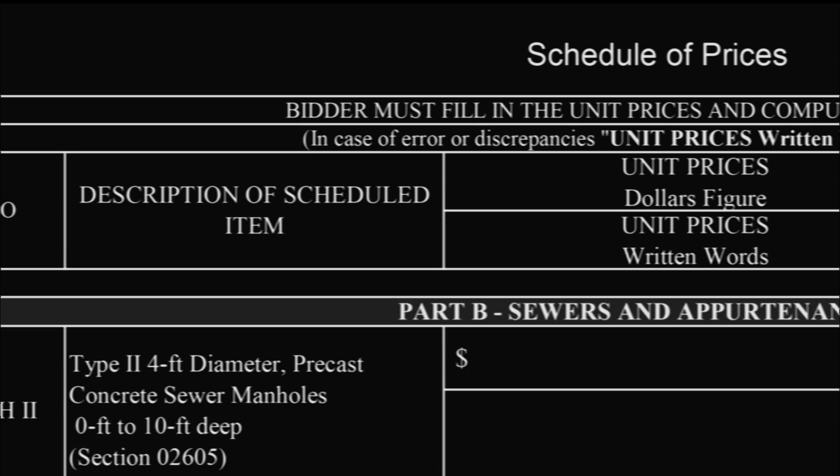For prime contractors, a certain percentage of their dollars spent on their contract have to be with small businesses, minority businesses, women-owned businesses. Our supplier diversity program promotes hiring local people throughout the community and getting them on our construction projects as well. We conduct workshops on how to do business with the MDC, how to be a subcontractor, bonding requirements. We marry up the small contractors with our prime contractors who are bidding on our projects.

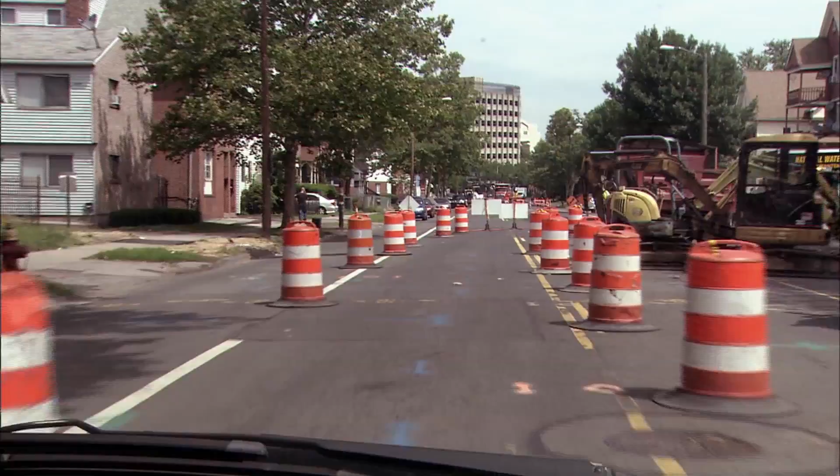And through this long, tedious process, the public needs to know what's going on. They have a vested interest financially and in the outcome. The reason why we have this community outreach office is to be accessible, let the community know that we're open to them. It strengthens relationships with the community and also builds new ones for people that might not have had much interaction with the MDC.

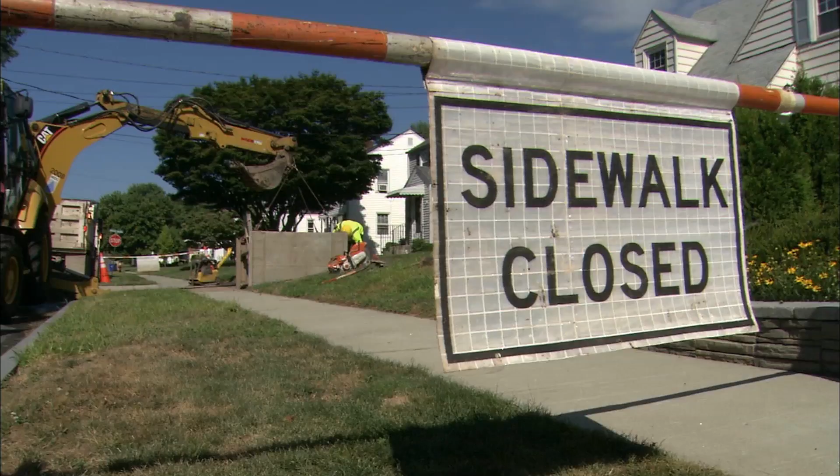Public outreach is really key to the success of any large-scale project that has such a long time component to it, because these sorts of projects can be very personal to folks in neighborhoods. It's one thing to tell somebody when they vote on something that this is going to happen, and then 3 years later they're working in your street. So you need to really be reminded about what it means at all different levels - what does it mean for a community level, what does it mean for an individual neighborhood level. That requires constant community involvement and public outreach so people are reminded about why we're doing things, and we're doing it on a big scale.

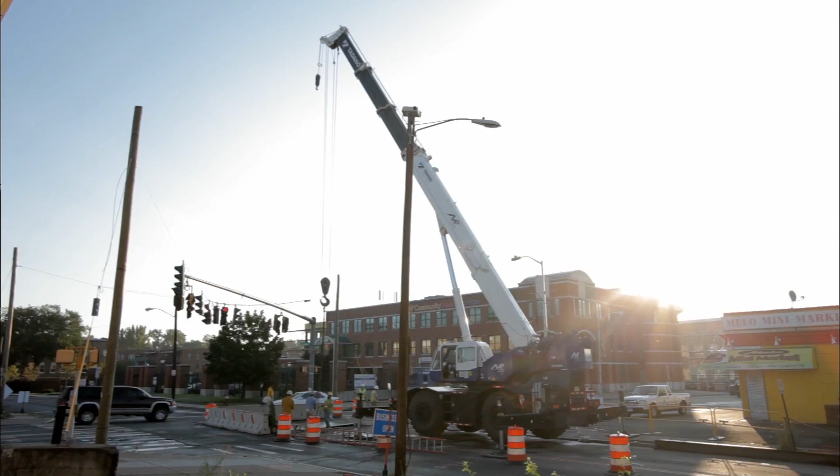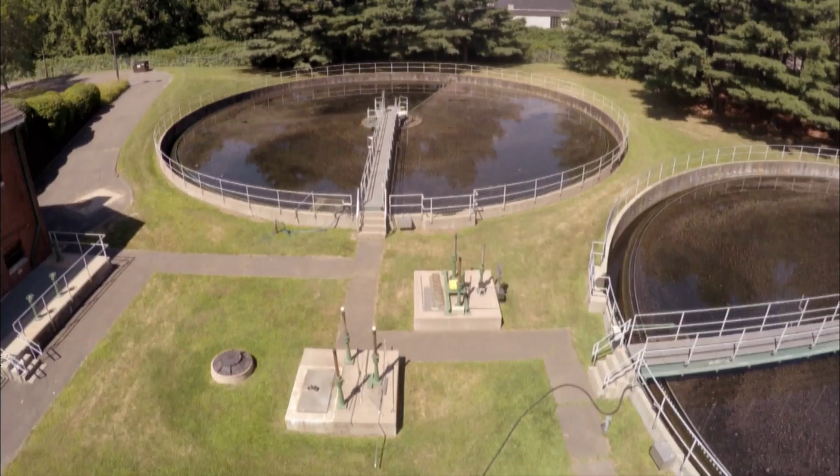The Clean Water Project won't be completed for another decade, but progress is visible. Since we've started those nitrogen removal improvements, the district has removed over 1 million pounds a year of nitrogen from our effluent. That's a lot of fertilizer and potential pollution we've eliminated from the Connecticut River and Long Island Sound.

Before the Clean Water Project, you would see a lot of streets flood because the catch basins on the side of the road didn't have the capacity to take all that water in. Now the roads are taking the stormwater in more rapidly, getting rid of it more rapidly.

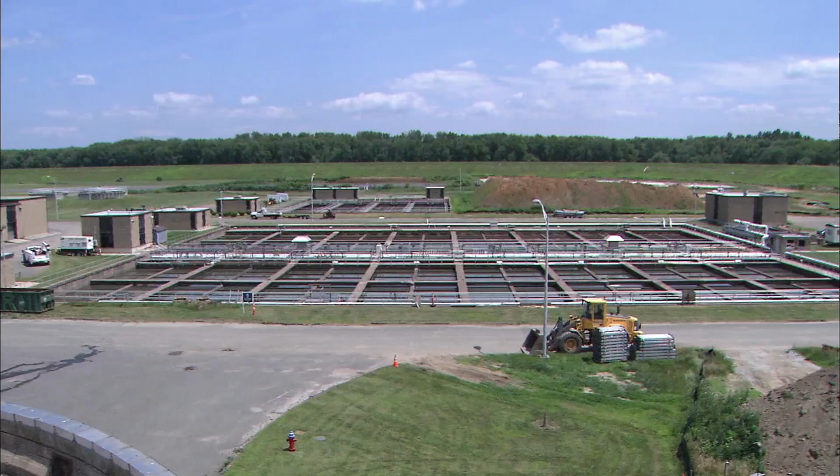The MDC Clean Water Project is important because of all that it's accomplishing. It's improving the system in the street itself. It's increasing and improving the treatment, both the quantity and quality at the treatment plant, as well as dealing with the CSO issue with these combined sewer overflows.

The Clean Water Fund is really an example of a successful partnership between the federal government, who provides a certain amount of the funding, state government, and then local municipalities, all working together to provide really good low-cost financing for important environmental projects. When the Clean Water Project is finally done, the river's going to be cleaner.

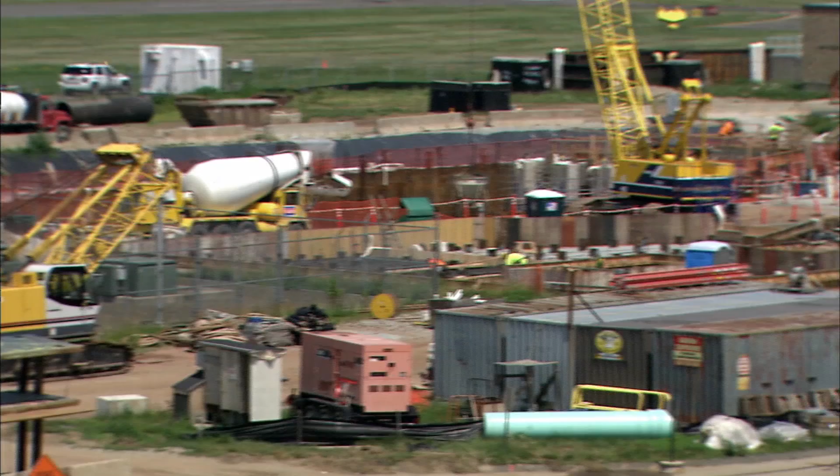It's going to be cleaner for people. It's going to be healthier for the critters that live in it. And it's going to be an even more important economic engine for this region.

But while the project will be a significant accomplishment, it's only one in a series of ongoing battles to protect our waterways. The elaborate system of dikes around Hartford used to control flooding from the Connecticut River is almost 90 years old. A dike failure could flood Hartford and cripple the MDC's main wastewater facility.

If that dike gives way, you got a major problem. We've seen what rivers can do and how devastating they can be to life and property. So that's one of the issues that we have with the city, working with the city to make sure that we don't have a catastrophe.

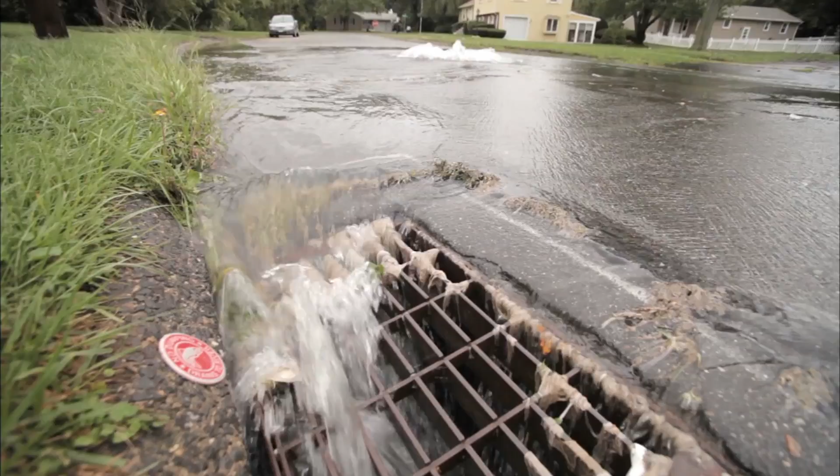Another challenge is more difficult to tackle and affects communities throughout America. The next nemesis for this country is going to be stormwater. Stormwater, in some cases, has as much contaminants as sewer might.

Stormwater, running off streets and parking lots, picks up toxic substances like gasoline and benzene. We have more streets, more parking lots, more buildings. Those are surfaces that are not designed to absorb water, that water just hits them and runs quickly. When it does that, it washes all the stuff that's on the streets into the storm drains, into the sewer drains. And those are additional pollutants that can potentially end up in Long Island Sound.

There's no question that Long Island Sound and the Connecticut River are two of our most valued resources, both worth maintaining and preserving for generations to come.

The Connecticut River affects so many people. It is so important to keep it clean. We've done such a good job in the last 30 years cleaning it up. We need to go that extra step.

We've come a long way, and we take it for granted too many times. People should be vigilant in terms of protecting their environment and the ecology, because not to do it becomes very expensive in the future.

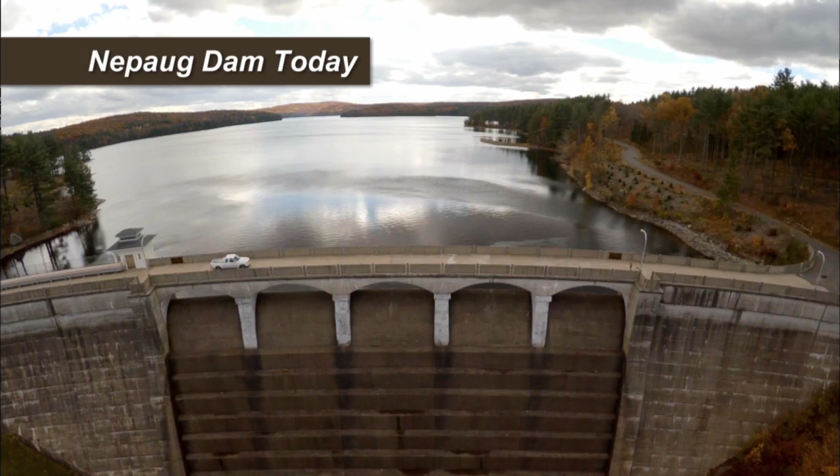As you look across the country, the whole question of how we deal with water is going to be the predominant issue of the 21st century. Where there's good water health and cleanliness, we're going to keep it. And where it's not good, we're going to restore it.

We're all part of the problem, and we're all part of the solution, and we're all part of the successes. We all live downstream.